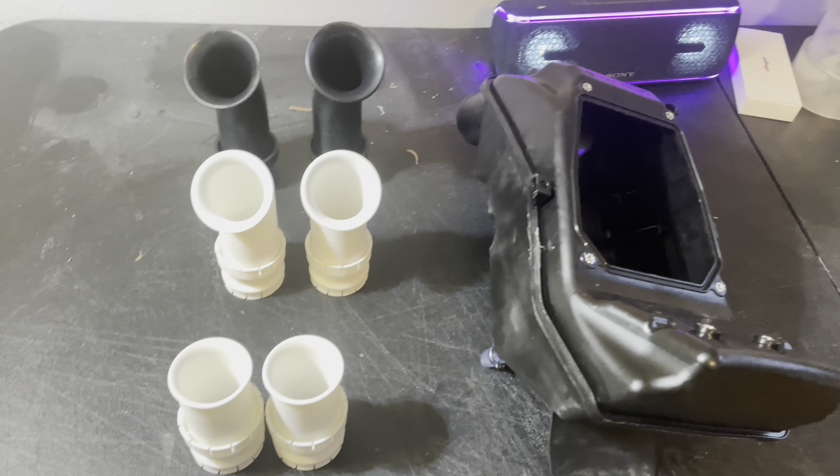And what you're looking at is I got two sets of TST velocity stacks, one set of the stock stacks, and the airbox for my GSX8. And so first, talk about why did I order two sets? So I was concerned that because they were different sizes, that they would require individual fueling for the cylinders.

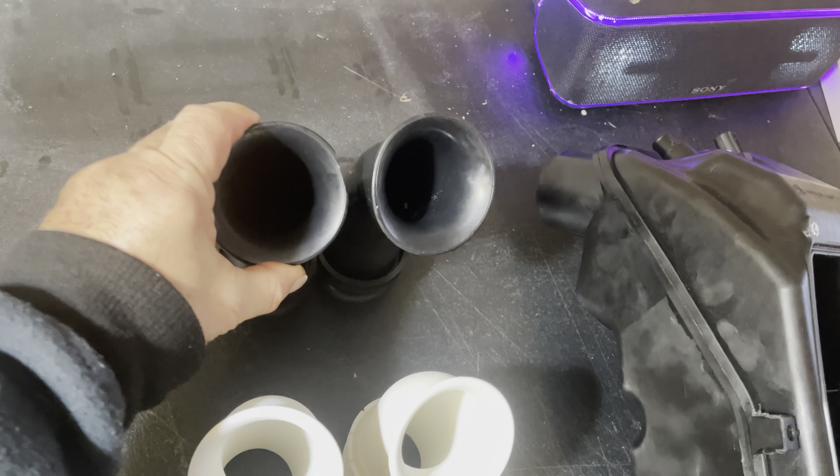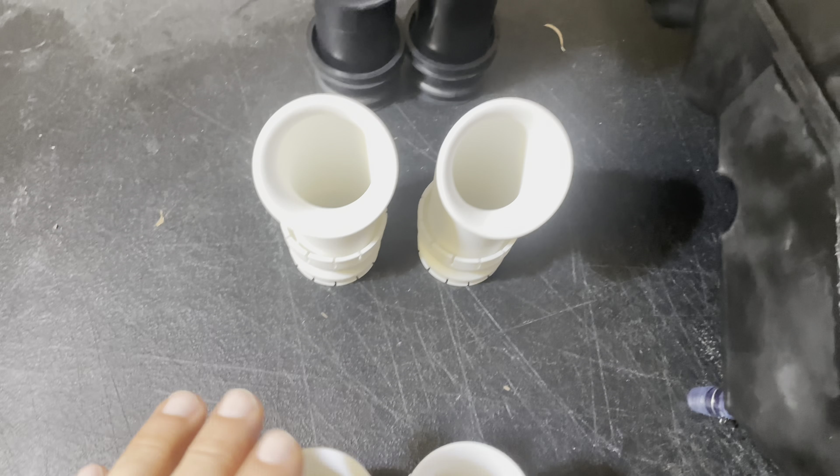And if we look, the stock ones are different sizes. If you also notice the length of the longer one from TST, it's a little shorter than the stock one, but not much. So since I have these here, I'm going to do a couple tests with these. The first one is I'm going to try running both of the shorter ones and see what that does to the power curve.

And then I'll also know how much fueling changes I need to make for the short stacks versus the long stack so that I can individually tune each cylinder if it's needed. So then that way I have the best fueling possible and I can know the offset between the cylinders. Then, of course, I will test it with how they come and I will decide which one I like better.

I get the question a lot with different things, is it worth it? And one of the reasons that I put so many different dyno charts on and I do it from step to step when I do these modifications is so you can decide what's the difference, right? It's really cool when we look at where it was stock versus what it does when it's tuned with the airbox mod and all that stuff. But that's like 4 steps, right? So I show you each step as I go so that you can make that choice.

Is it worth it for you? If I just got this exhaust without the flash, what are the gains? Okay, and then here's the gains extra that you get with the flash. Helps you make an informed decision. And a lot of times with those, it's pretty easy because you just get this increased area under the curve from start to finish. You have no places that it's below the stock curve. So it becomes pretty easy to evaluate. With the velocity stacks, it's going to be a bit different, and let's explain why.

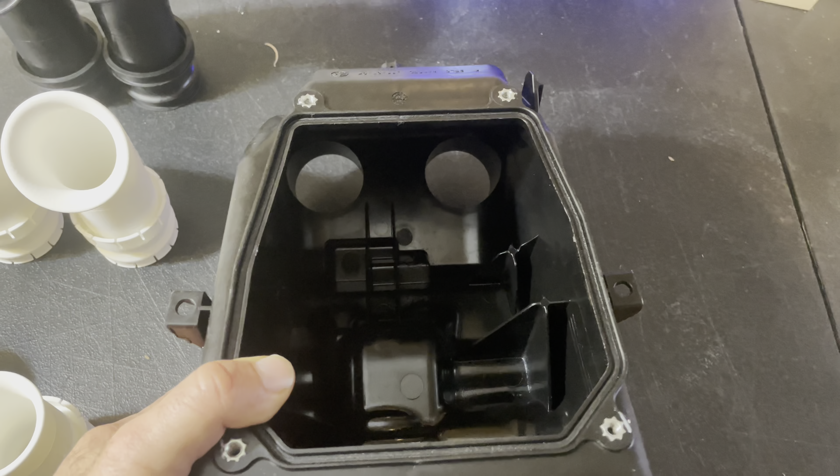So if we take a look inside the air box, you can see the openings where the velocity stacks go through. And what happens, and I'm not an intake engineer, and I don't exactly understand what exactly is going on, but I know what happens. And what happens is, believe it or not, as the intake charge is coming into the motor and the intake valve slams shut, the air is moving so fast that it actually builds up pressure behind it.

And that pressure actually comes all the way out and creates a pressure wave coming out of the velocity stack that comes in through the air box and bounces around the air box. When we change the height or the length of the velocity stack, what we're doing is changing the RPM that pressure wave actually helps the intake charge go into the motor. So when the factory is setting up velocity stacks, it's always a compromise of where do you want the power.

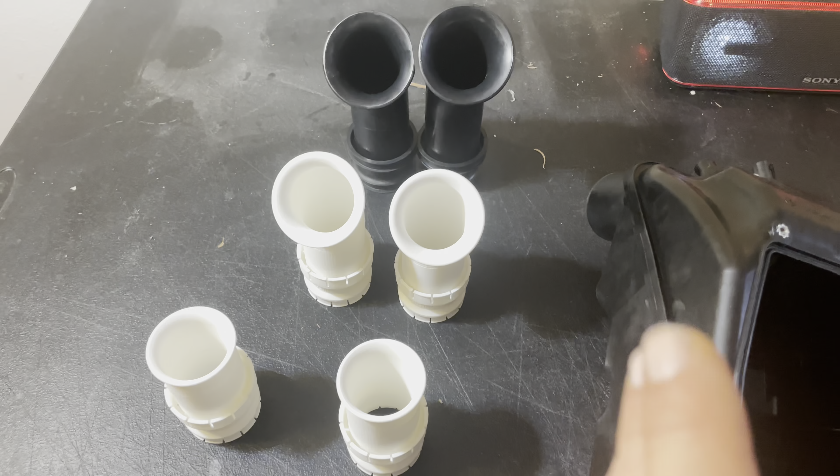Shorter stacks make more power higher in the RPMs. Longer stacks make more power lower in the RPMs. And a lot of times you'll see these staggered or dual stage so that you can spread that out a little bit more. It's working better in this RPM range on this cylinder, and then this RPM range in this, and it kind of broadens that out a little bit. So when we're looking at these really short stacks, what that's going to do is move where it makes the best power higher in the RPMs.

So how did we decide if it's worth it? So we're going to look at the area of where we ride the most. So for a street bike that we're riding around between probably 4 and 7 or 4 and 8 grand most of the time, shorter velocity stacks are probably not going to be something we want to do. If we're constantly revving the bike up to red line and shifting the gears close to red line, well, then these velocity stacks are something that are more likely we want to change to.

So what I did is I looked on my dyno and compared gear to gear when we shift how far the RPMs drop. And always the drop from first to second is always the farthest. So if we shift the GSX8 from first to second gear right at red line, we drop to about 6,400 RPMs, 6,500 RPMs. All of the rest of the shifts are 7,000 RPMs or above.

So if I was at the racetrack and I'm coming out of a corner, if these velocity stacks can raise the power from 7 grand up without destroying the bottom end power, for me at the racetrack, that's probably worth it. Coming out at above 7 grand on just about any corner is going to be easy. Almost no corners are first gear corners, and it's going to rev through it so quick that a little bit of less power from 6,300 to 7 grand is not going to really affect it.

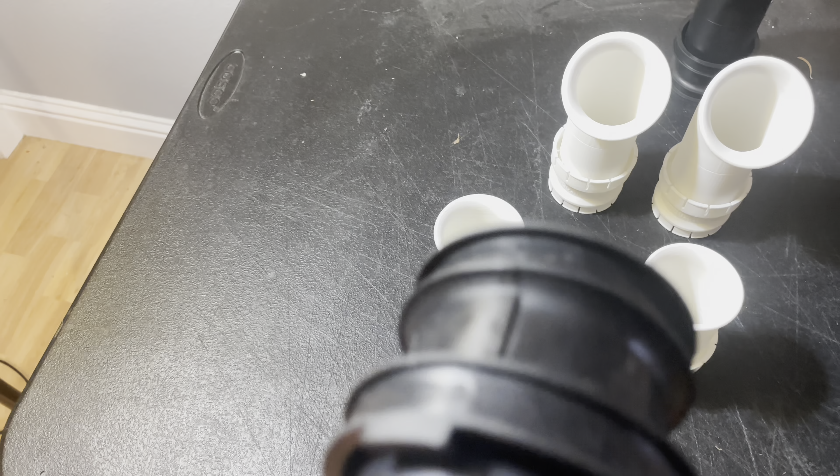One quick thing. I am a little concerned about the sealing on the throttle body. So traditionally, velocity stacks are rubber on the ends. And why is that? Because this slips over the throttle bodies, and we can clamp it, and it will seal. On these, this is the part that slips over it, and it's hard. We're going to put a clamp here and clamp it down, but it's still trying to get hard against hard, metal against this nylon material, and we're going to see if it seals.

So I'm happy to report absolutely no leaks. So good job, TST. I checked it several times with the starter fluid like I talked about. It never had any problems. When I compare these, I'm going to compare from the Stage 2 airbox, so that the only thing that's changing is the velocity stacks. When you buy the kit from TST, it comes with the Stage 2 airbox lid.

So all of their testing just shows from the stock airbox to this whole setup, which I don't think is completely fair, because as we know, the Stage 2 airbox makes a really big difference across pretty much the whole rev range. So it kind of exaggerates the gains a little bit for the velocity stack. So the only thing being changed is the velocity stacks when we look at all these dyno runs. So the first setup I did was both short stacks.

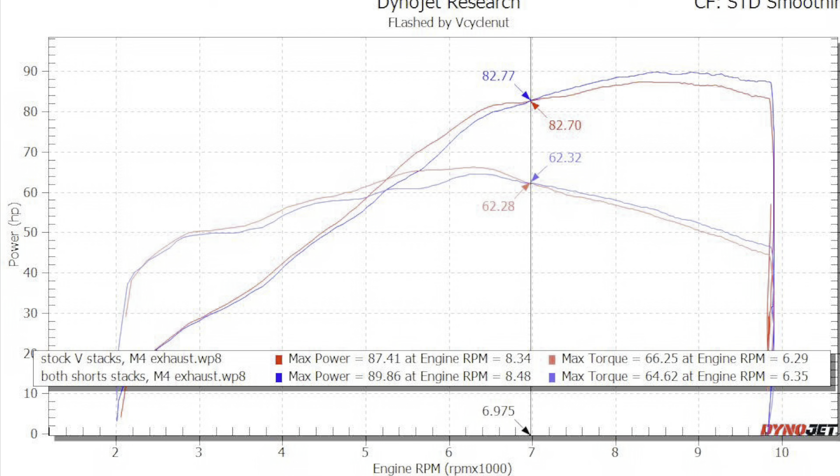It did not require major fueling changes, but obviously since I did the work to put these on by themselves, I made the necessary fuel changes to get these set just perfect. And as you can see with both short stacks, the RPM where we crossed over was right at 7,000 RPMs.

So from 7,000 RPMs up, we have nice little gains, and we can see I just missed 90 horsepower, about a 2.5 gain at peak. And you can see really all the way out at peak, I'd say it's probably closer to 3 or 4. But we did lose quite a bit from 7 grand to 4,500. So for a street bike, not thinking this is great, but race bike, drag bike, definitely would be a hot setup.

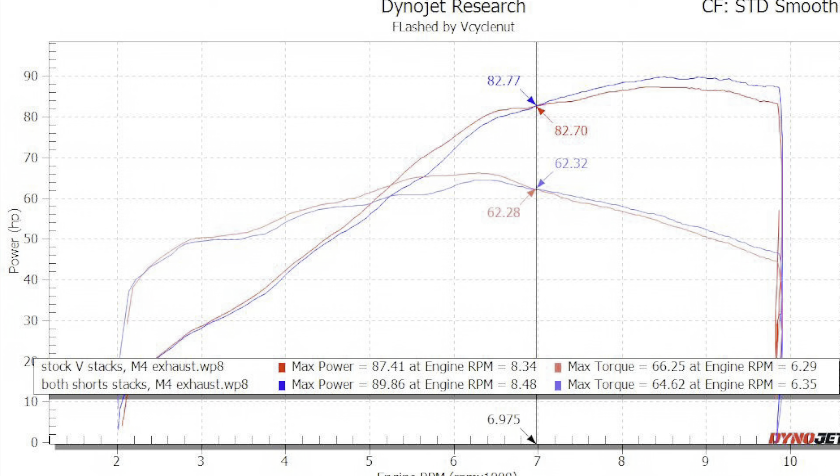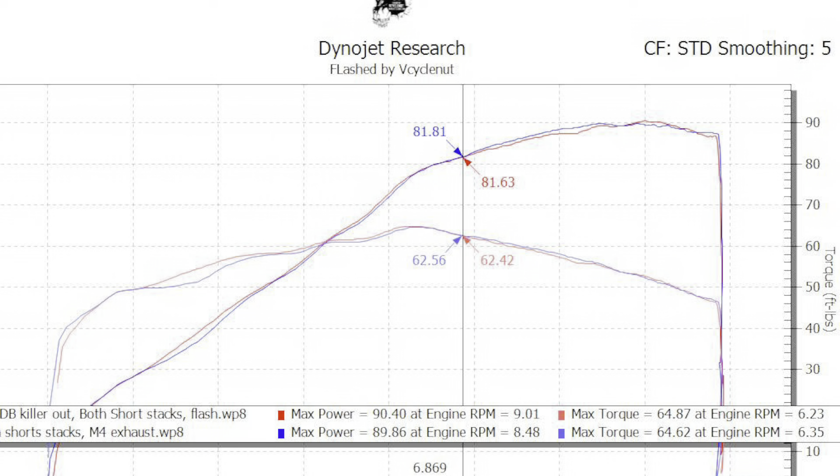Notice again that the DB Killer out, oddly enough, again, does make more power from around 3 to 4,300. Same thing I showed with the stock velocity stack, so not an anomaly. That is true. But again, still, the best setup is DB Killer in.

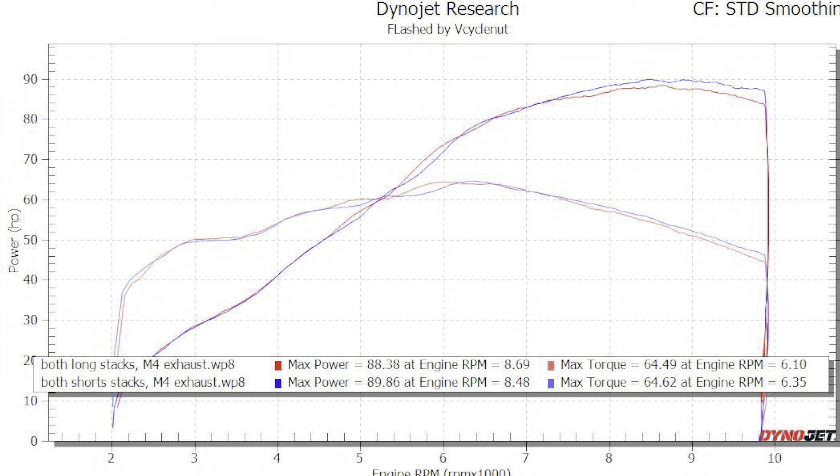So then I put the DB Killer back in, put both longer velocity stacks in it, adjusted the fueling to get that perfect for that. And what we can see is you lose about a horsepower on the top, a horsepower and a half at the peak number. And you do gain from about 4,500 on to almost 6. So this is with both long stacks versus both short stacks.

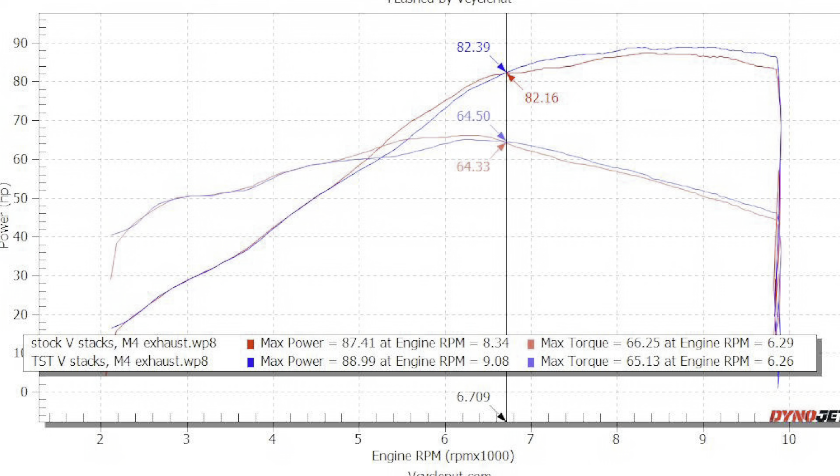You can decide where you ride your bike the most and what's the most important to you. So for me, at the racetrack or if I was drag racing, I definitely would have the TST stacks. If it was just a street bike, I'd probably stay with the stock stacks.

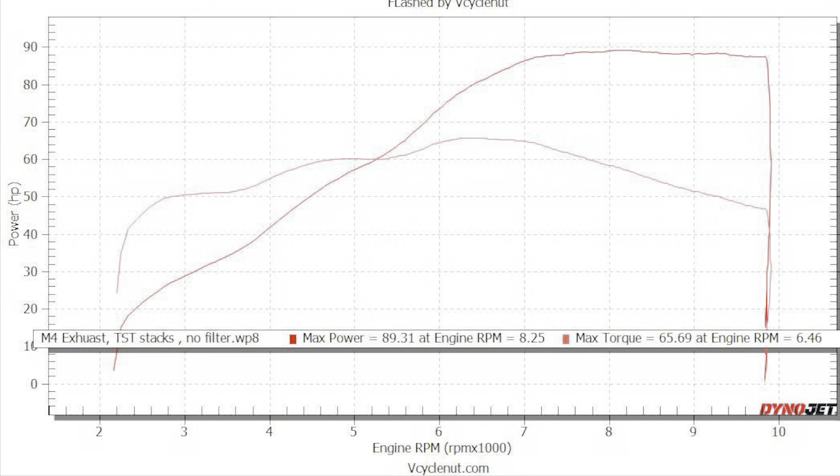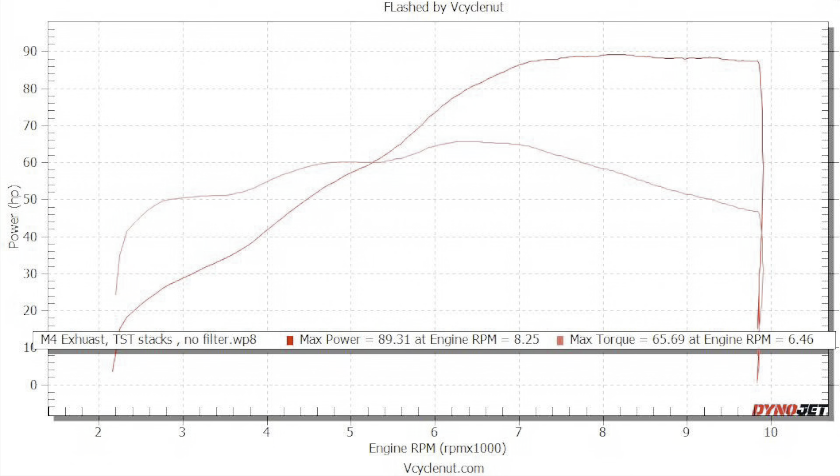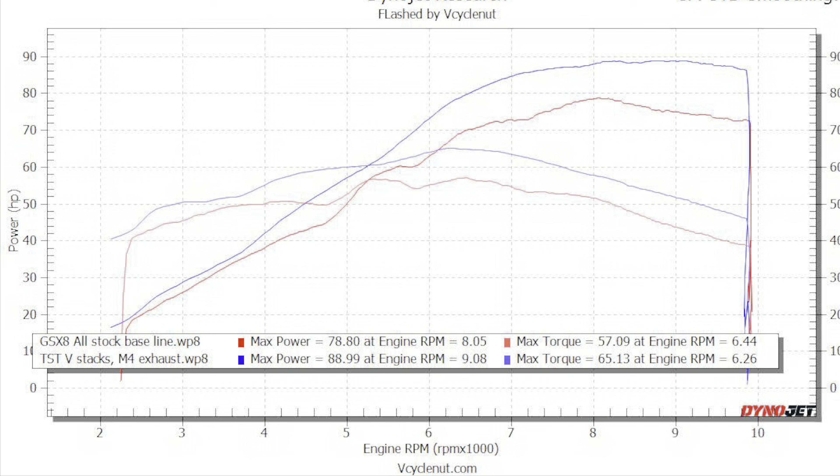And if we compare the stock bike to the M4 exhaust, DB Killer in, stage 2 airbox, Sprint filter with TST V-stacks, this is what we got. And it'd be pretty easy to forget about that little bit of loss that we had between 5 to 7 grand when we look at this curve, because it's just killing it. Pretty nice.